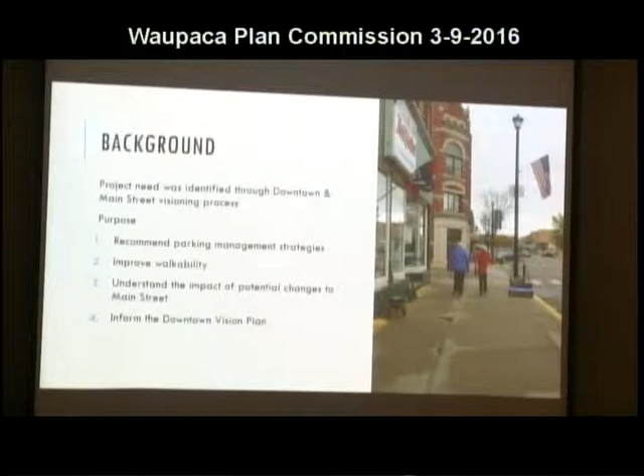So an overview. As Brennan has already mentioned, the purpose as we see it was to evaluate the data that we have collected through 3 data sets, and recommend some parking management strategies that would help Waupaca currently and in the future as you continue your vision plan to overall improve walkability, because as you'll hear me mention throughout the presentation, walkability and parking are 100% interrelated. And then, separately, we wanted to look at the impacts of potential changes to Main Street on how parking is oriented.

Approach: we looked at a 20-block study area as part of the scope. We collected 3 sets of data that included 4 days. We looked at 2 days in August prior to Labor Day, a weekday in October, and we also looked at a December weekday in order to capture holiday shopping, if you will.

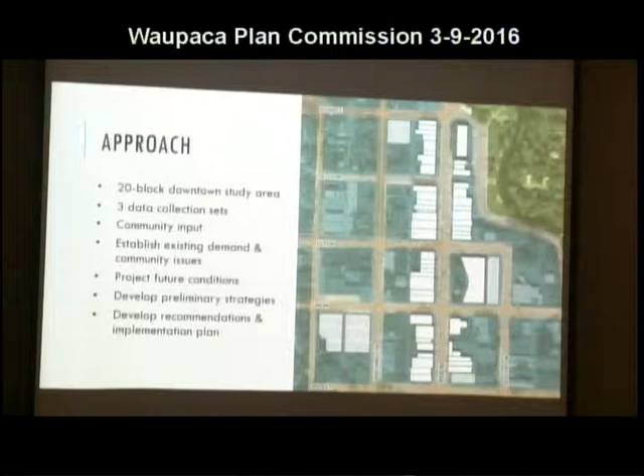We received community input, which I'll go through separately, establishing the existing baseline demand and how the community perceives the parking issues, and then projecting future conditions, which I'll talk a little bit more about once we get to that point, coming up with some preliminary strategies to address the parking issues, and then coming back with recommendations and an implementation plan.

So, community input. This part of our scope consisted of a business forum meeting where the downtown business community was invited. We had some mapping exercises. We had interactive polling, and all the results have been summarized and will be available within our report. This Plan Commission meeting is for discussion and feedback.

We conducted about 8 key person interviews, both in person and on the phone. During the October data collection, we did in-person intercept surveys while we were performing that data collection, talking to people walking on the street and asking them a few questions about parking.

And then we had an online survey that's been available for, actually I think it's over 3 months now, with 285 responses as of yesterday. So that is a phenomenal response, actually. This is far more responses than we get for communities that are 3, 4, 5 times this size. So that's very impressive.

A little brief summary of the key points that I took away from both the survey and feedback from the business community and our key person interviews. Talking about preferred diagonal versus parallel parking, this was a big topic of conversation amongst the public, all related to the orientation of these spaces along Main Street. So we directly asked the question, was there a preference in this type of space over off-street parking, perpendicular parking, parallel parking, on-street versus off-street?

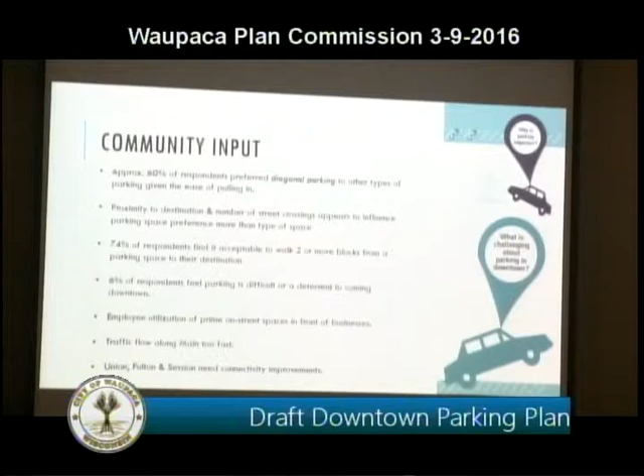About 6% of respondents felt that parking was difficult or a deterrent to coming downtown. This was determined from questions that asked about the ease of parking in a rated response. Employee utilization of prime on-street spaces. This was determined from key person interviews, from in-person feedback, as well as comments that were filled in on the online survey.

And something that came up time and time again was traffic flow along Main Street. Many people felt like it was too fast, particularly between Badger and Fulton. They felt uncomfortable with the speed of traffic. They felt like it was more of a highway than a downtown.

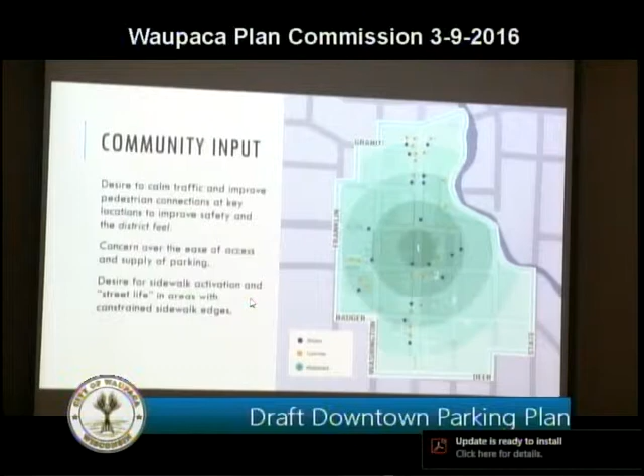And then there were also several comments from both the business community and customers about the perceived connectivity of Main Street to the blocks off of Main Street, and they felt like it was very disconnected in terms of streetscape and lighting, these perceived barriers that we'll talk about in a little bit. This is basically just a reiteration of what I just went through. These were the comments that we got from the business community.

And then I just wanted to go through the analysis. I have a lot of slides on this, but I will try to run through it because sometimes I get into too much detail. So speed me along if you would like. We looked at a whole range of data sets. We like to start from the very beginning to really build a demographic of the community in our minds, since every community is very different.

We looked at population by age because specifically there were comments about needing to accommodate an older demographic perhaps than some communities. And in fact, you can see there's a very interesting mix here of age groups. A lot of 80+ females. I have never seen a graph that looks quite like that. And a median age of about 40.

This is in comparison to, I had that number, Appleton was 33.8, Milwaukee 31, Oshkosh 33.5. So it is an older demographic than an urban, larger community. Journey to work, we always look at this data just to get a feel for what's happening in the community in terms of traffic.

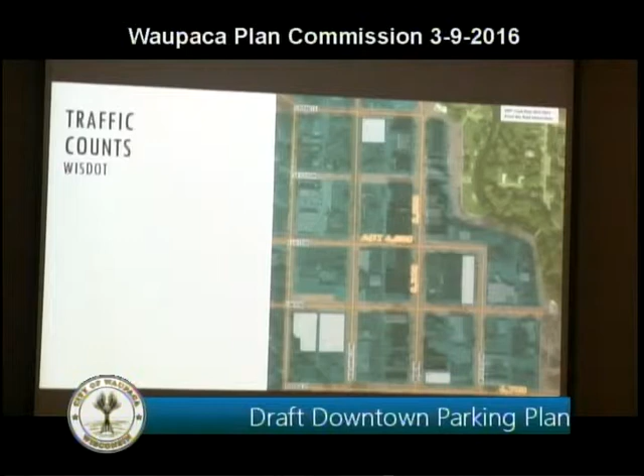Crash data. We obtained crash data from the police department. We looked at data 2013 to 2016. We basically grouped it into either turning or angled accidents, accidents related to parking, and bike and rear end, and you can see those crashes that were mapped.

You're seeing the data from 2013 to 2016 now, but we felt like it was very important to point out that 10 of the 17 reported crashes in 2013, and I should say this is just the defined area of the 20 block study area, this isn't Waupaca as a whole, but 10 of the 17 reported accidents were related to someone backing out of one of the angle spaces in downtown and either backing into a parked car, or there was a pedestrian incident, or getting rear-ended as traffic approaches on Main.

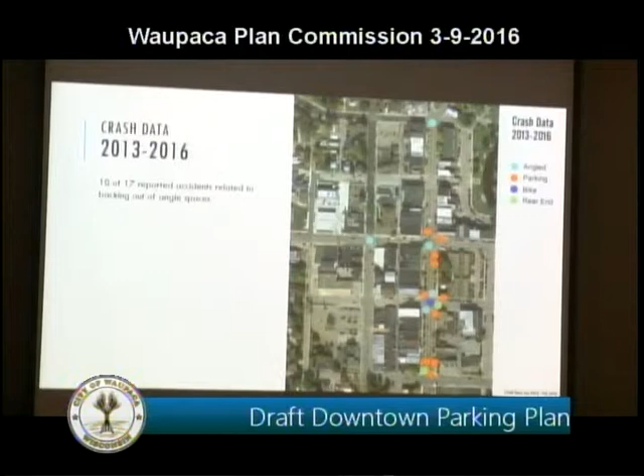Parking supply. So we went through and inventoried all of the parking as part of the data collection effort, grouped those parking by designation, time limit, the type of space. You have about 1,300 parking spaces total in the 20 block area. 780 of those are public, the rest being privately owned. And these were mostly just the larger parking lots. We didn't necessarily count every parking spot on every alley or anything.

So 580 on-street spaces, about 200 in municipal lots. And then we determined that about half of all of the public spaces are diagonal spaces, and that breakdown is approximately half on Main and then half off Main on Fulton, Union, etc.

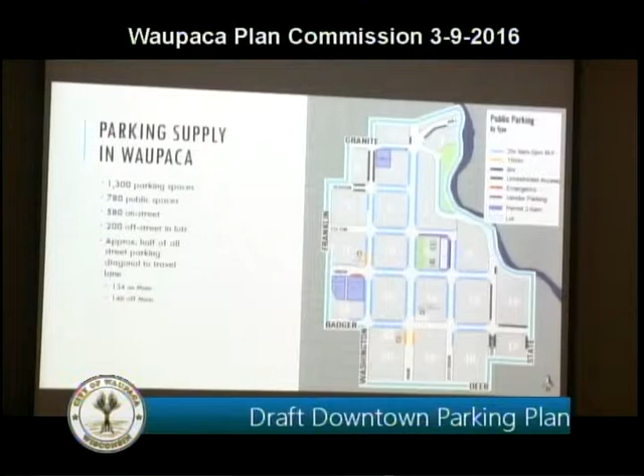Seasonal demand, and this is a breakdown of the seasonal traffic counts that I mentioned: the 2 days in August, the weekday in October, the weekday in December. You can see from this information, Saturday is lower than the weekday counts, but overall, you have no seasonal variation whatsoever. They came out amazingly the same within 3 vehicles. But the peak is technically the August weekday, so that was the data that we used as the basis of our analysis.

And you can see this is the graph of the parking spaces over that weekday in time, the peak being right around lunchtime at about 295 occupied spaces. The bar at the top is the 779 of supply. These colors are really hard to see actually, but the line that's labeled peak 295 is the total of the other 2 lines. The other 2 are the breakdown of lots and on-street spaces. That's a 38% occupancy of the total overall 20 block study area.

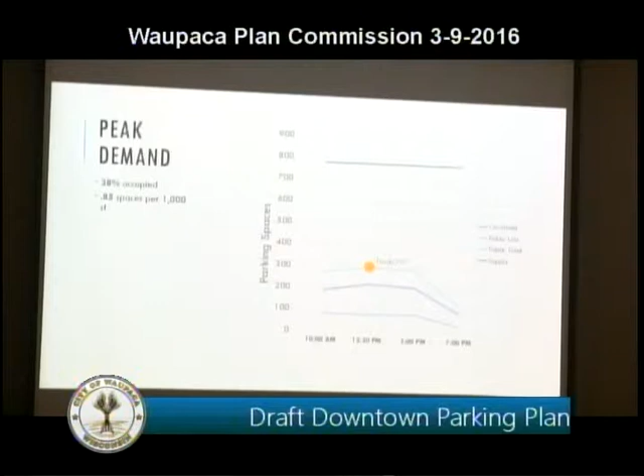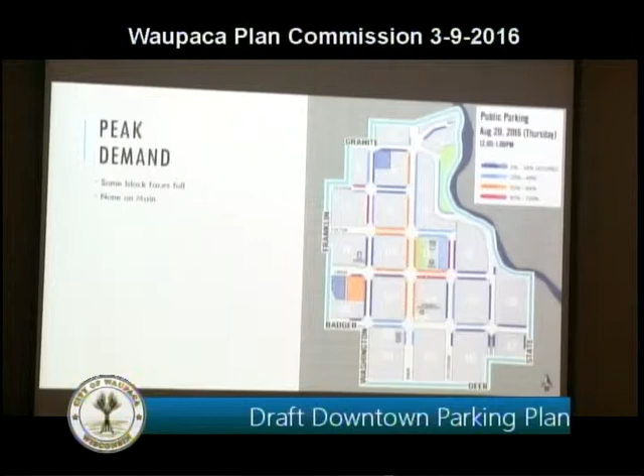Future needs. So part of our scope was to also look at future needs of parking. And the model is somewhat limited in that the data we have is sort of a flat growth model. We don't have location-specific redevelopment at this point. So what we did was we looked at a min, mid, and max scenario, looking at your overall peak demand of the community, which actually only happens during that noon hour, but that 0.85 vehicle demand per 1,000 square feet, we applied that to a min, mid, and max scenario.

And those scenarios being 50,000 square feet of growth in the downtown, 100,000 square feet of growth in the downtown, and then 200,000 square feet of growth. And these graphs show sort of the comparison of what your current demand would be, the increase of what your parking demand would be with that 100,000 square feet and the 200,000 square feet. And then the supply at the top is still the 779.

Just to note, the information we have is a vacancy rate of about 100,000 square feet in the downtown. So that's kind of how we came up with the min, mid, and max scenarios. But I did want to point out that this analysis is only looking at public supply. So the assumption is that anything that is built or filled or occupied of that square footage, the assumption being that no new parking would be built for that use.

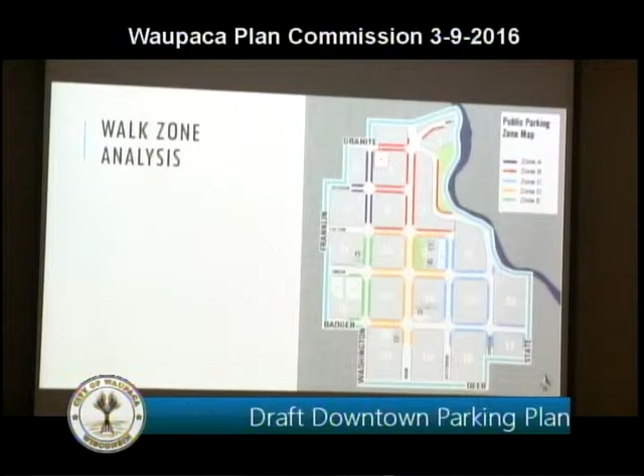That's not to say that a use on the edge of that wouldn't use parking on either side, but that is the limits of the model. So in as much as you have a destination smack in the middle of the zone, you also have a destination that's on the edge of a zone that actually has use of parking supply in another zone. So we feel the model is pretty representative and can generally give you ideas of your surplus and demand. So here's the breakdown of what the surplus is by zone.

We looked at the capacity of that zone, the peak occupancy of the zone, and then determined either the surplus or deficit that is served by the area.

I have 1 second here.

So what this basically shows, and this is also adjusted for about a 5% cushion and circulation and so on and so forth, just to give a little more conservative estimation to the numbers. So, overall, in all of the zones together, you have about a 470 space surplus in the downtown. Every zone technically has a surplus also. Zone D is where you see the lowest surplus at about 50 parking spaces available at any one time.

And that zone in particular is because all the other zones have off-street facilities that are assigned to them. And zone D, we did not assign the off-street municipal lot on Union to that zone. Which we can talk about later, but we felt it was the most conservative way to approach it because of the feedback that customers feel that parking facility is perceived to be a little bit more difficult to get to because of various reasons, which we'll get into.

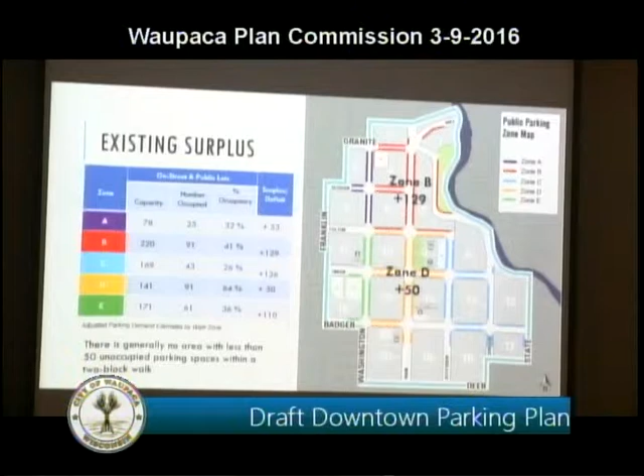But the point of this slide is that there's no area within downtown where you have any less than 50 parking spaces available at any time within 2 blocks. Duration and turnover: we also looked at how long people are parking in these spaces and how often these spaces are turning over, because as I'll get to in a little bit, this is very important in your prime parking spaces, as the business owners of course know.

So we looked at the 4 blocks of Main Street between Badger and Granite. Throughout the one-day survey that was conducted, about 66% of the parkers parked for less than an hour, about 23% parked between 1 and 2 hours, and then only 11% were basically in violation of the 2-hour time limit. And I say 11% because this is actually fairly good for communities that do not have metered parking pricing. 11% is actually fairly good for just relying on enforcement to have that turnover.

Overall, the spaces are used on average about 3 times per day. 4 would be kind of your goal. And that's basically just because you have a 2-hour time limit, and between 9 and 5, you don't want anyone to stay over 2 hours. So that's 4 vehicles using a space per day, and that's very typical for a commercial area is what the goal should be.

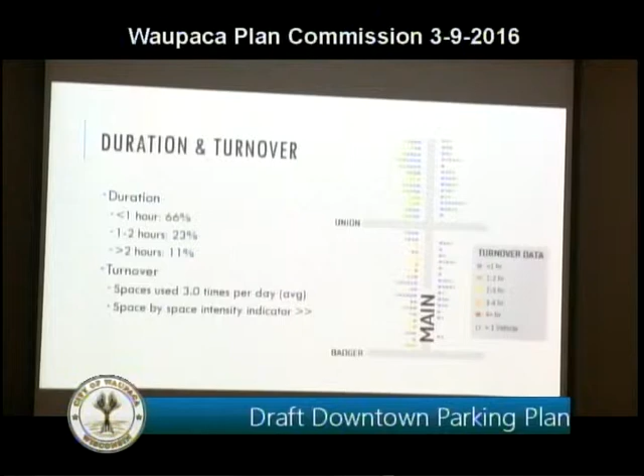So we mapped these space by space and car by car to get an idea of the intensity of how these spaces are turning over, and that's the graphic you see to the right. It's nice to kind of see the orange and the red, and even the yellow, that are in violation of the 2-hour time limit really hinder the turnover of that space. The spaces that have the blue and the green have a much higher intensity of turnover. Just pointing out the importance of the turnover.

So now I want to present sort of our findings, but more so the metrics that we use to get to the findings. This is a graphic that I like to show every community because I think a lot of it gets lost when you start talking about large commercial development sites versus downtowns. This is a 250-foot walk shown to scale, basically in comparison to each other, of the Pick 'n Save versus downtown. And you can see that 250 feet is a whole different ball game in a large development site versus downtown.

And if you took your downtown commercial block and all of its fabulous uses and plopped it down, you still have a parking lot that's bigger than your block. So this is very important to keep in perspective as you start to prioritize the use of land in your downtown.

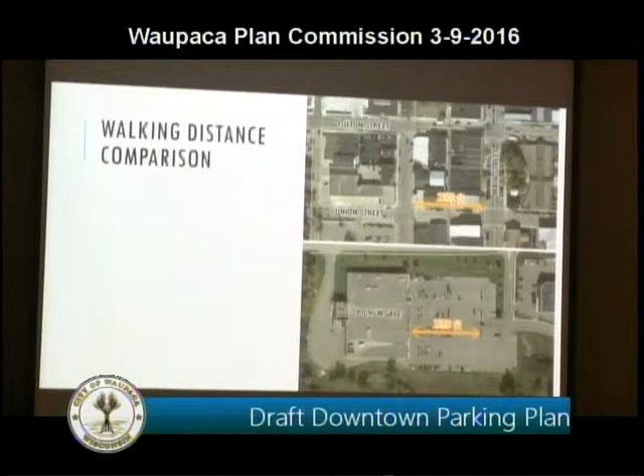Downtown parking needs, and again, this is a slide on metrics and how we like to look at parking needs. Because this is a commercial district, your priority user is the customer because it's zoned commercial. In a residential area, your priority user would be the resident. But customer parking equals convenience parking, which you have to keep in mind as you determine all of your methodologies and strategies. These are convenient parkers that choose convenience over other things. They may not be familiar with the system, so you have to accommodate that. They have varying needs, such as the 2-hour parker versus the 15-minute parker.

And these are the people where turnover of those prime spaces are so important, because you have people running in, you have people unfamiliar with the system, and you have to accommodate people that are supporting your downtown business. Perceived safety and walkability really affect these parkers because they're unfamiliar with the system, or because they just want to jump in and jump out. This is where you can really impact the use of the spaces.

But at the same time, you can't forget employee parking, which has a different use of longer term, and these people are very familiar with the system, so you can take advantage of that. Resident parking, of course, you have 80 spaces in downtown. I can't remember the number of units. So resident parking is something very important as well.

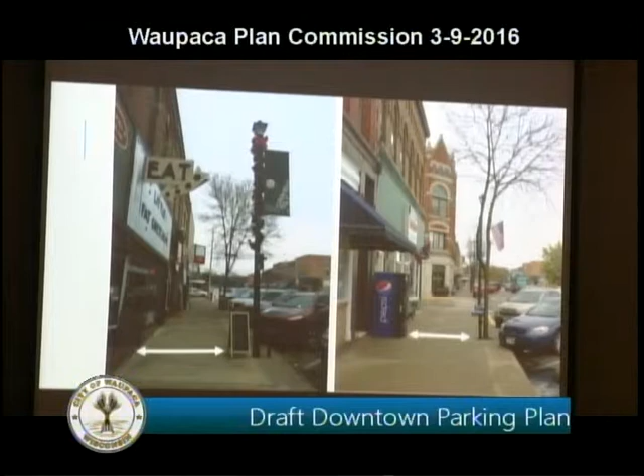Walkability basics. So this slide, I just wanted to run through because this falls into the strollability of downtown and also the supply of parking, because the bigger your walk shed, the more comfortable people are with walking. The bigger your parking supply is, because people walk farther to get to parking. These are standards that we follow in the industry.

Having 4-foot minimum, obviously for ADA, 5 to 6 feet preferred, but 8 to 12 feet is the standard recommended through the National Association of City Transportation Officials. That is the pedestrian thoroughfare, not necessarily the sidewalk width. Pedestrian crossings at every quarter mile to connect your downtown.

Crossing standards, and this possibly applies more to your signalized locations, but considering that you have slower walkers, are your signal timings enough so that those people can cross the street, installing countdown timers as a standard, and then reduce curb radius, because this really affects your crossing distance, which you want to keep as low as possible.

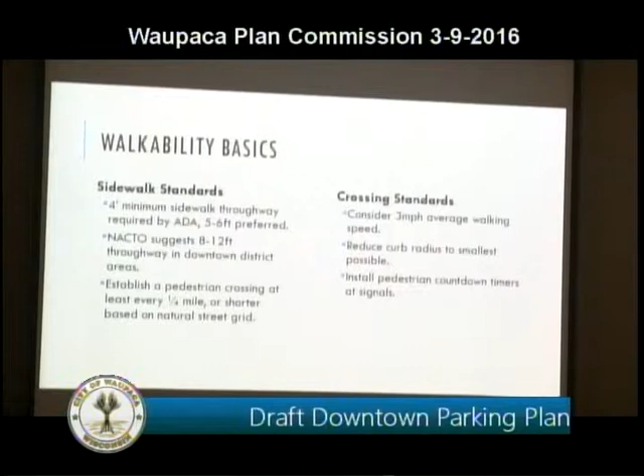What you see on the left is the existing sidewalk, and how we break down the usability of the sidewalk is a frontage zone, the pedestrian zone, and the furniture zone. So within that, it's 9 to 10 feet in some areas. You have a frontage zone of about 2 feet where you have planters, people putting out signs, door openings in some cases. Then you have about 5 feet of walkable zone, and then 2 feet of the furniture zone where the tree pits are located, which is remarkably small. The trees are growing in there actually.

And then on the right shows what you'll see in the later cross sections of an 18-foot sidewalk, where we could fit in a larger frontage zone where you can fit seating areas for cafes and whatnot. Pedestrian zone of 7 feet, which is slightly less than what we typically go with of the minimum 8-foot recommended width. And then a furniture zone, as we show, with 3-foot planters and benches.

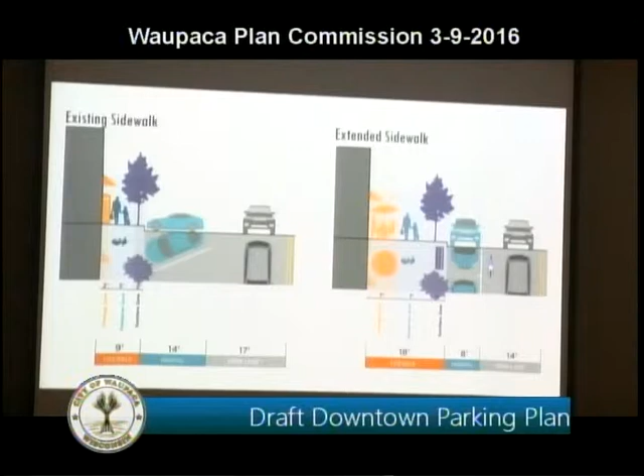Relationship to urban design, that being parking relationship to urban design. I just threw this slide in because I wanted to connect the dots between parking and walkability. There's been many studies in the planning world about the economic benefits of walkability. And so this was one of the studies that we had actually worked on in Chicago on the people spots, where they are using parking spots to extend the sidewalk, and the benefits that the commercial businesses are seeing because of that extended sidewalk space, which in Chicago's case, they mostly use for cafe seating.

And then I also wanted to point out the benefits of parking as a traffic calming tool, because a lot of times that's neglected to be mentioned, but I've never recommended, I don't think in my 10, 11, 12-year career, for parking to be completely removed on a street, because we like it as a traffic calming tool.

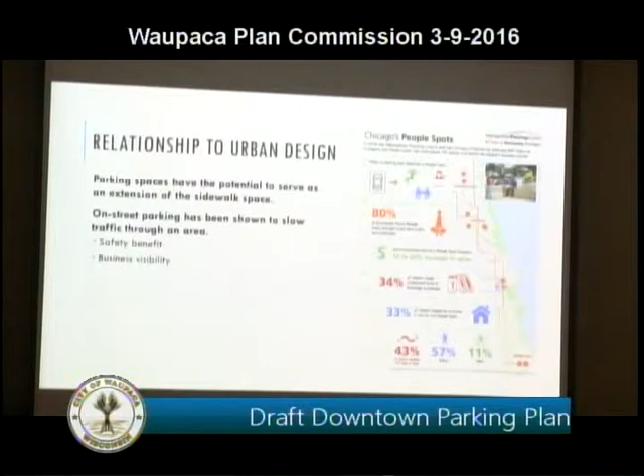So, just summarizing both the data that we collected and these metrics, we feel that the off-street lots are underutilized. In some cases, the library, of course, is not, but number one and number 3 are underutilized, with as much as 50% or more available at any one time. About 50 spaces are available at all times within 2 blocks of essentially every point in downtown.

We found through the turnover, but mostly through public feedback, that there is a problem with employees using the prime spaces on Main and dodging enforcement, which is a very common problem in a lot of communities. The public feedback we received is that there are advantages and disadvantages of parallel and diagonal parking, which I want to talk about a little bit once we get to the sections. But there was a pretty clear consensus that there was a desire to calm traffic on Main Street, enhance the pedestrian crossing safety along Main, and activate the street life.

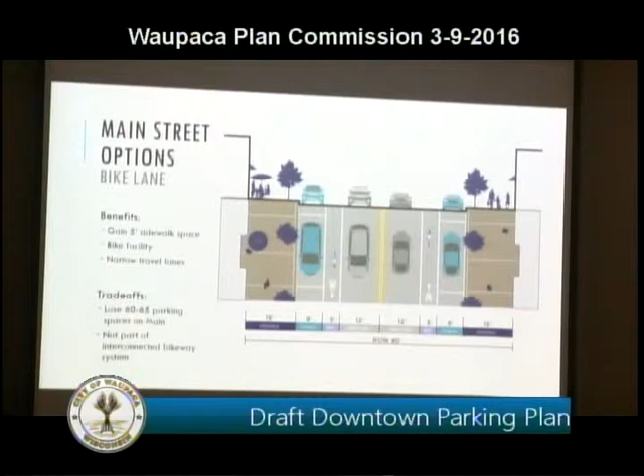Then in a similar light, you can also fit in a separate bike lane, which gives more protection to your cyclist, takes a little bit away from the width you can gain in the sidewalk, but has a nice 12-foot at a maximum travel lane, which will nicely calm the traffic. And you can still get a 15-foot sidewalk. But this is the same condition on losing 60 to 65 parking spaces.

And then we also wanted to look at some options where you mix it up. What you're seeing is one of the alternates that we came up with by offsetting the center lane, using the full 80 feet and getting 14.5 feet of sidewalk on each side, keeping diagonal parking on one side, and changing it to parallel parking on the other. You don't gain as much sidewalk space, but 14 feet is still a decent sized sidewalk, and you are losing half the parking spaces. Another alternate to this, which we don't show graphically, is actually 2 alternates.

One could be you maintain the center line at the center of your right-of-way and alternate diagonal and parallel parking on a block-by-block basis. So in one block, parallel would be on the right and diagonal would be on the left. On the block north, you could reverse that. But then your sidewalk width is not consistent along the entire 4 blocks. You would have 14.5 feet of sidewalk on one side for 1 block, and then it would be reduced to 9 to 10 feet on the next block, if that makes sense.

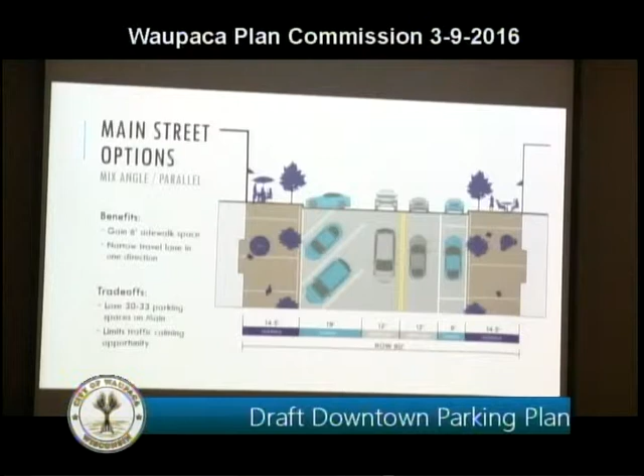So gaining about 6 feet on average between those different options of the mix, but it does limit your traffic calming opportunities because of the wide travel lane needed for diagonal parking. So recommendations. This is the preliminary set of recommendations that overall we see will benefit downtown. We have no stance on how Main Street is carried out at this point, just presenting to you the benefits and trade-offs.

But overall, we can recommend unfailingly that there should be improved walkability throughout downtown, and that can manifest as intersection improvements, improving your intersections with curb extensions, both with a parallel parking condition as well as a diagonal parking condition, maintaining the high visibility crosswalks that you have out there currently, and possibly even upgrading to different paver types, providing LPIs at the signalized locations.

We feel that it will really improve your parking availability if the streetscape, as you move forward in your visioning, extends east and west off of Main, sort of carrying that cohesion east and west off of Main. That will really help connect the blocks off of Main and increase the comfort of walking from parking to Main Street. But we feel that calming traffic along Main is pretty important to the walkability of downtown, and seems to be very important to the community from the input we've received.

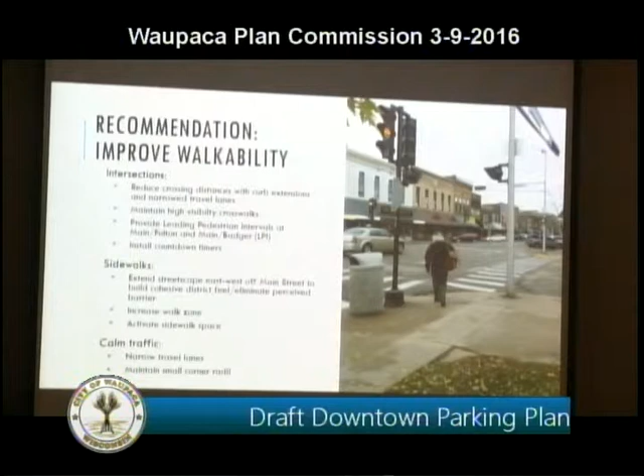Maintaining small corner radii, which you have currently, just as you go forward with engineering plans, just keeping that small corner radius, because that's what's really key in making it a pedestrian-friendly crossing by shortening those crossing distances.

And then the recommendation of park once, by creating a parking system that everyone understands to be a parking system that consists of on-street parking and off-street parking lots, and that when you go downtown you can find easy, available parking, and creating this by improved wayfinding. You do have parking signage currently, but wayfinding and clearly articulating what each block is meant to accommodate, what type of parker each lot is meant to accommodate, defining those public lots, if you will, branding them to be this system that everyone understands. You have a place to park, and then you walk and you stroll. Again, focusing on those east-west connections off of Main.

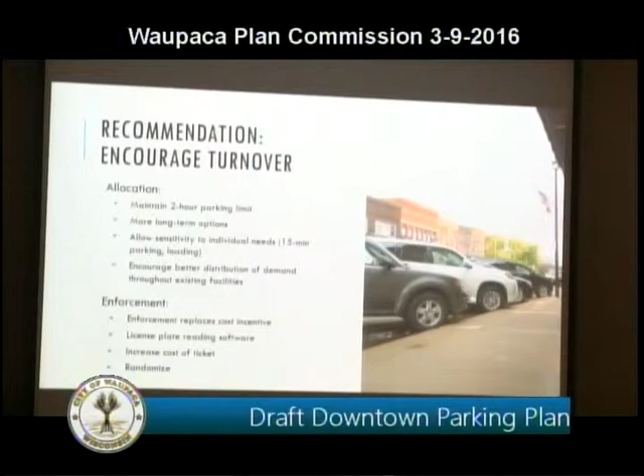So one of the recommendations was maybe looking at different software that the police department uses that could read license plates and can effectively target employees that maybe are space jumping, which can help free up your prime parking, which we hear is the problem. But that of course has to be very randomized, so it can't be a method where they come at 11 every day. And that's it. So I would be happy to answer any questions, and I hope to come away with any and all of your feedback.

Comments, commissioners? I think it's a very thorough study, and it's nice to see the community engagement involved with this. Obviously, we'd like to hear from the committee members and key people that were involved with that as well, to get their opinions. It's kind of interesting to see the surplus of parking. I kind of had a feeling the study would show that, but just the targeted locations of where that is and the average dailies that were applied.